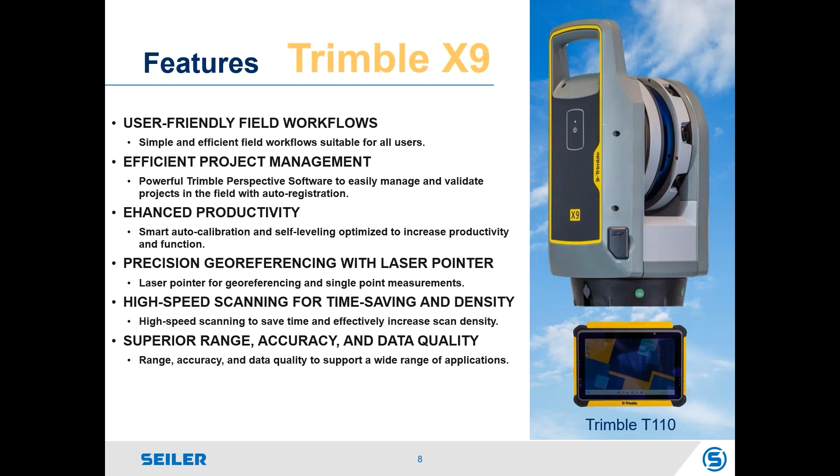And the range, accuracy, and data quality are pretty much unmatched. I have another page for some of its features because there are so many awesome features about the X9.

High sensitivity for dark, captures dark and shiny surfaces. If you've used other scanners, you might have seen problems like a bright shiny black car showing holes, requiring powder or spray before scanning for it to show up. The X9 takes care of that - you don't need any powders or sprays, and it shows up just beautifully. I'll show you some of that.

We talked about the auto-calibration, also survey-grade self-leveling, so it's dependable. We'll talk about this IP55 rating a little later on a different slide, but it's reliable for dust and water protection, and we'll also talk about the temperature ranges.

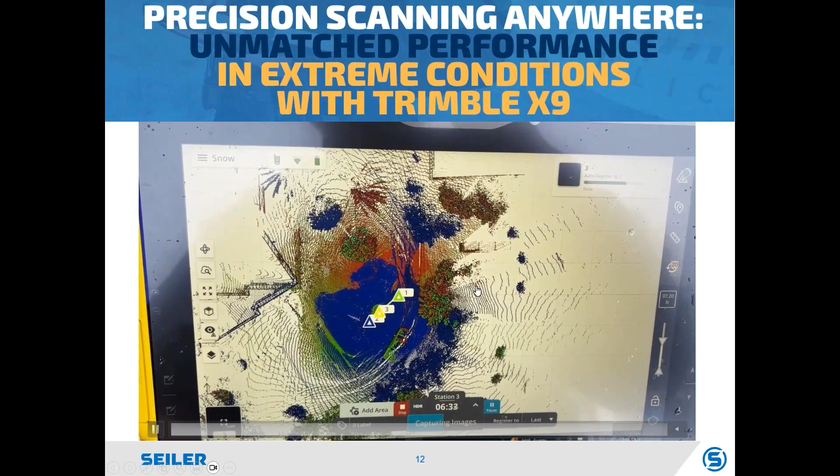You'll see this blue scan snap to the red and green scan here in a second. And so you see it's all registered there. If I just back it up, you can see it snapped in right there.

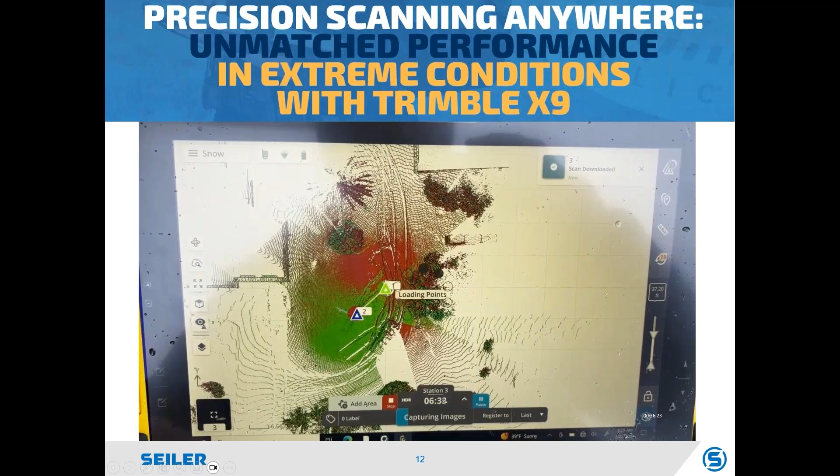If I clip that out, you can see the scanner scans so fast that you can actually see the snow here — it's scanning the snow as it's falling, because that's how fast the scanner is. It just kind of shows you proof that the weather isn't really going to affect your ability to go out there and get data.

There's no audio on this, I took the audio off. It's just one of our marketing videos that our marketing team did with Richmond, Kentucky Police Department, a big customer of ours. It's showing some of the stuff they're using it for in the rain, being able to do black shiny cars, low light situations.

We offer FoxFury lights for the scanners. And what's nice about the tablet is you don't need to be right next to the scanner. You can sit in the car or in a building, stay nice and warm, or stay dry, and operate the scanner without having to be right next to it.

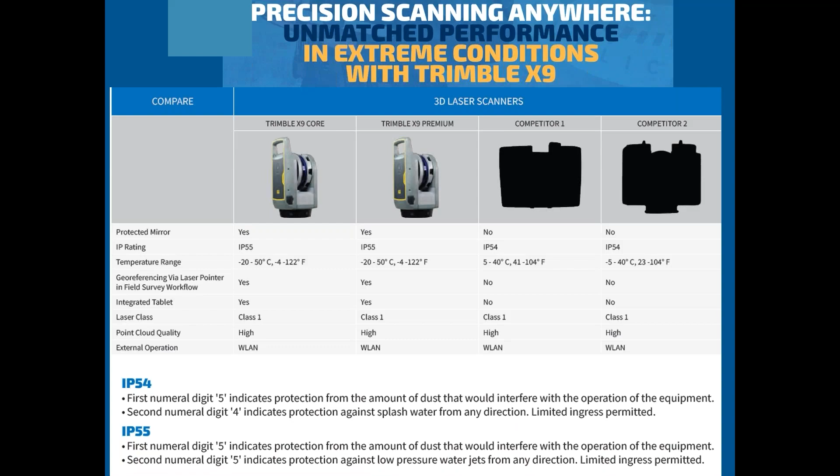So we put all this stuff to a test. We created a white paper, so we tested all this stuff in the extreme cold. I went and scanned in -3 degrees up in Michigan at night.

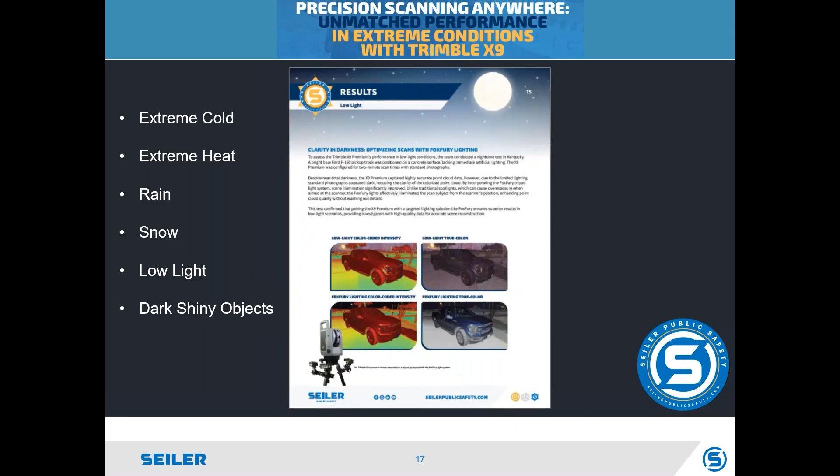Extreme heat, I did some scans at, well, I think the ambient temperature was like 97-ish, where the asphalt temperature was in excess of 100 degrees, and we took the temperature of the actual instrument that was baking in the sun, over 100 degrees. We also tested in heavy rain, heavy snow, low light conditions with no lights, and dark shiny objects.

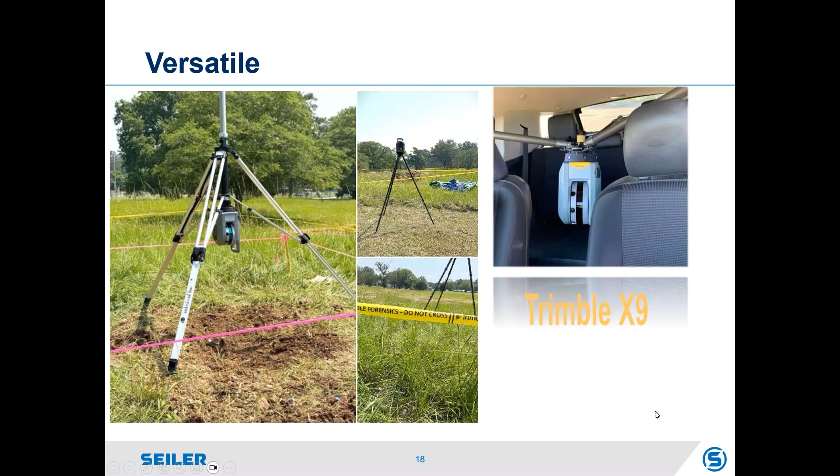We also sell the NIST target. NIST stands for National Institute of Standards and Technology. So each one of these targets is actually sent over and certified by its distance between those two points as 1 meter. So you want those in your scans because then you can verify its accuracy.

And that's why it's on an angle, so it's not just measuring or verifying on a horizontal or a vertical, it's measuring X, Y, and Z. So we can go into the software, this is the RealWorks software, and actually do a target extraction, then verify the distance of being 1 meter in between those.

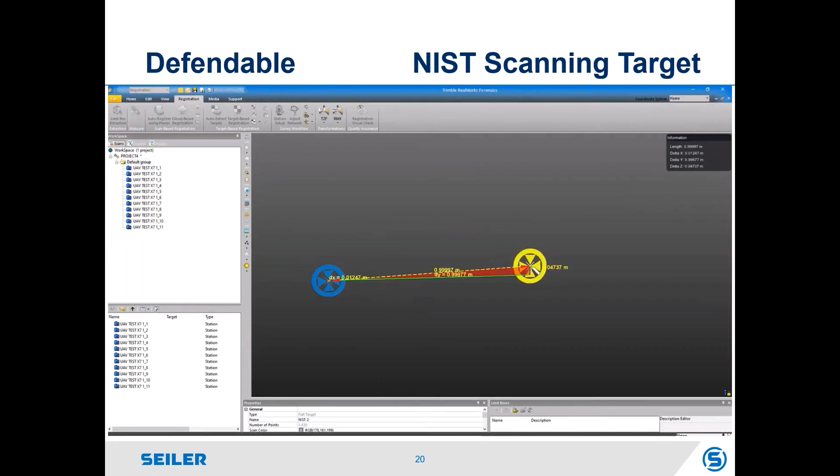So something that Trimble, and Seiler also, feel is very important, is having a solution that's defendable in court if you're ever asked about the accuracy of your data. So that's something we definitely try to include with all our scanner purchases.

You can take a photo of it, attach that photo to that point, and then you're going to grab and measure another point that's going to stand out in your point cloud, and it's going to have an XYZ coordinate to it. So it's almost like a topo shot or a total station measurement inside your point cloud, with a photograph attached. Justin, do you want to chime in a little bit about the precision point?

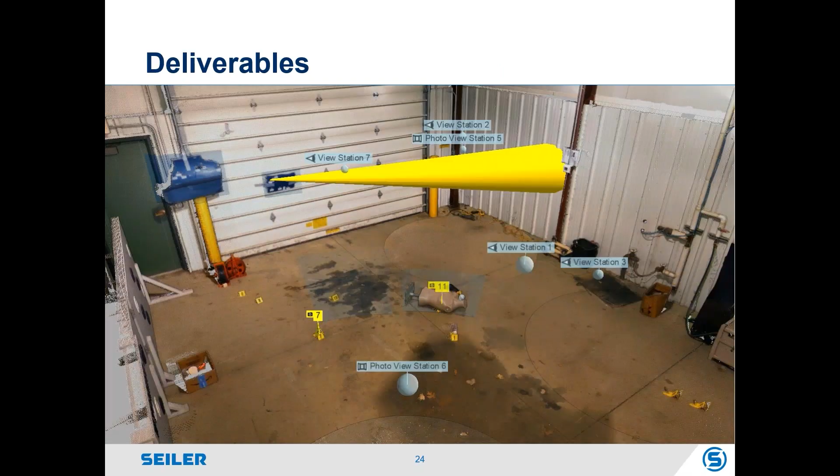Those photo stations also export to a free software called Trimble Showcase. If you're wondering how your prosecuting attorney can view this point cloud and navigate around in it, it's a free download, so you can export these view stations into there, and then your attorneys can move around in it. They don't need a supercomputer or any special training.

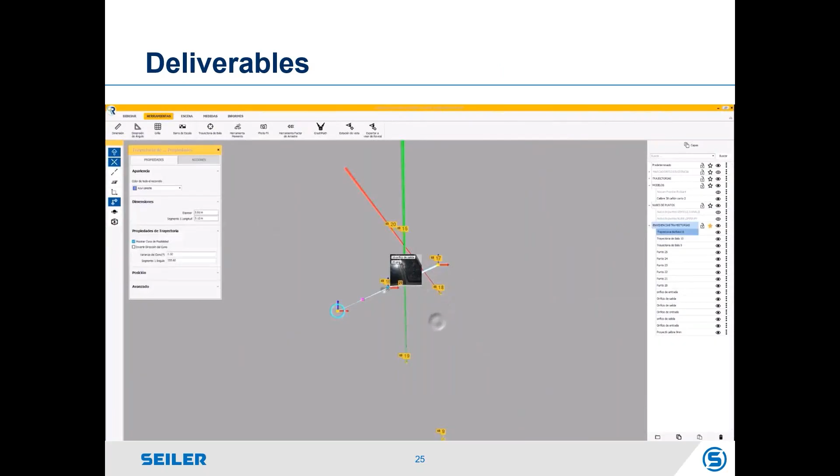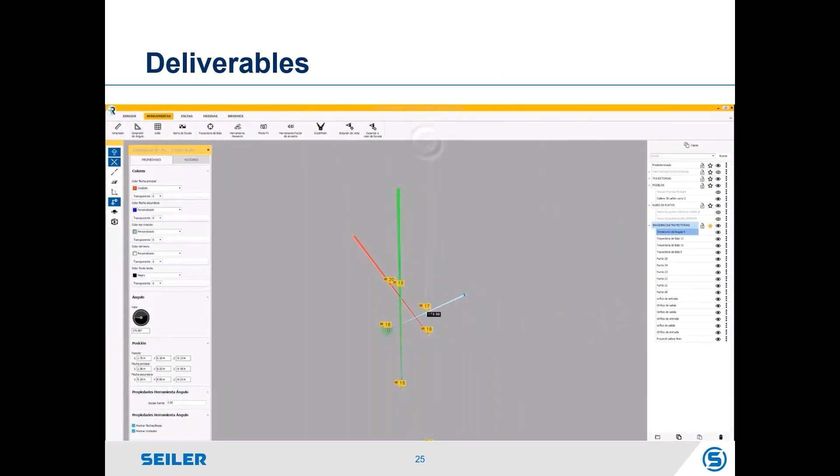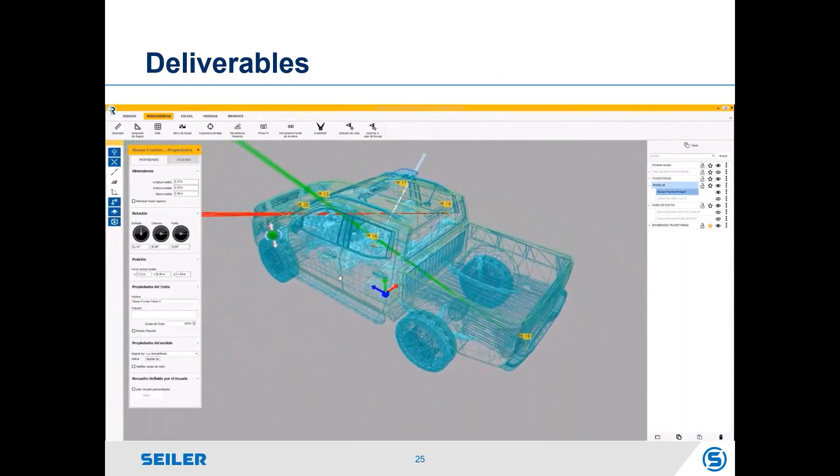This is an example of shooting into a car, in the Reveal software, taking that point cloud and the data with the precision points. You can see photographs attached to each precision point using the angle measuring tool and the trajectory tool, then creating a visual model, taking a model of the vehicle and putting it over the point cloud. You can make that model into more of a wire frame to show visually how that round penetrated into the vehicle as it went through. So there are different things you can do in the software for creating deliverables.

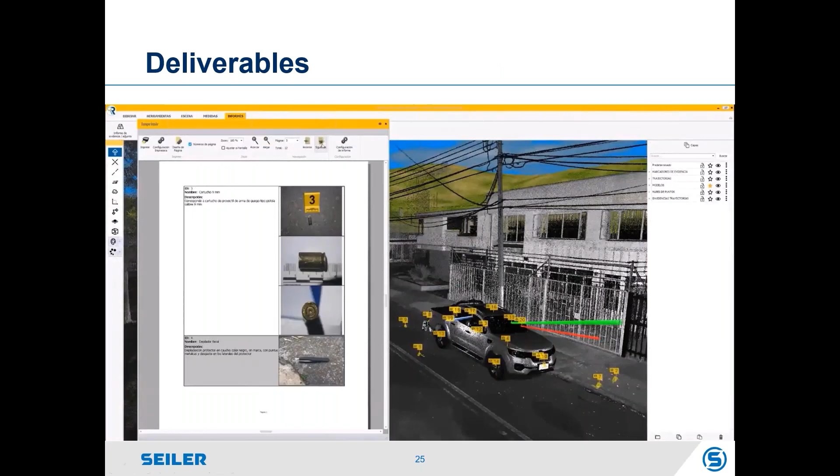So those are all the photographs taken with the, let me back that up a little bit. Right there is the evidence report, and those are photographs that can be attached to each one of those evidence markers on the right there.

You'd also use that at a crash scene, like tire marks will pop out in a color-coded intensity that might not be visible in true color. Same thing with an arson scene - arson investigators love this, with different views. In a grayscale view or color-coded intensity, things might pop out better and be easier to see. Fire and arson investigators might be able to find a point of origin just by looking at different views that can point them to where it is.

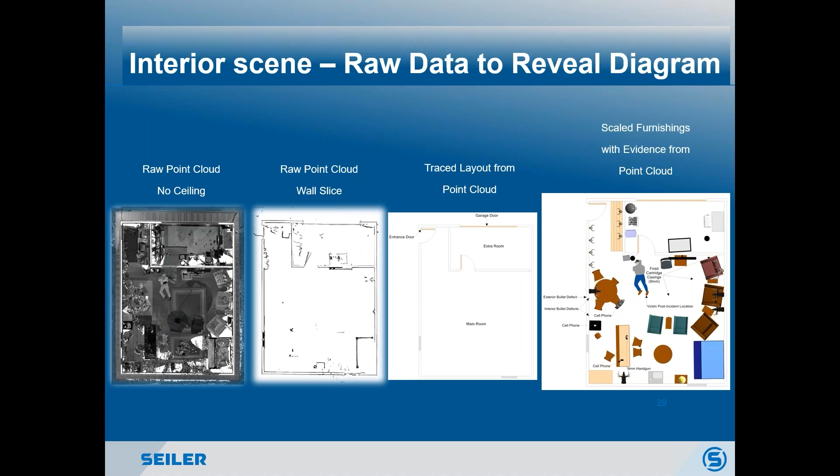This is just showing the raw files, and then I'll show what I did with this one. This is a shooting scene that happens in a bar. Someone comes out of the men's restroom, and then there's an interaction at the front door.

So if you have a case where you need to do an interview of somebody, and you're like, man, I really need a really fast and quick diagram or layout of the interior or exterior - this is done in RealWorks, but you can create these from these raw scan files. Some of these really fast layouts don't take any time at all.

So this is just showing the raw point cloud, and then from this, what I did eventually from a diagram standpoint - from that point cloud, every one of my interiors, I do this workflow on every single interior, and I layer my diagrams.

So the very first one is that layout. I have to figure out my exterior wall thicknesses, my interior wall thicknesses. Once those are set, now I'm using lines, ortho snaps. These doors, that's a function of a line, an arc tool. I'm snapping the lines and using rectangles. It's very simple, just basic CAD type diagramming.

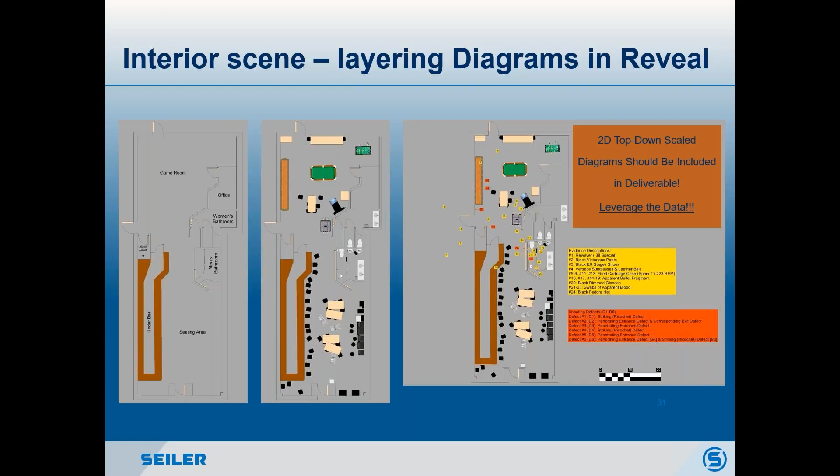So then after the furnishing gives you a lot more context, typically I will show a diagram with furnishings and then evidence. This one has a bunch of bullet defects.

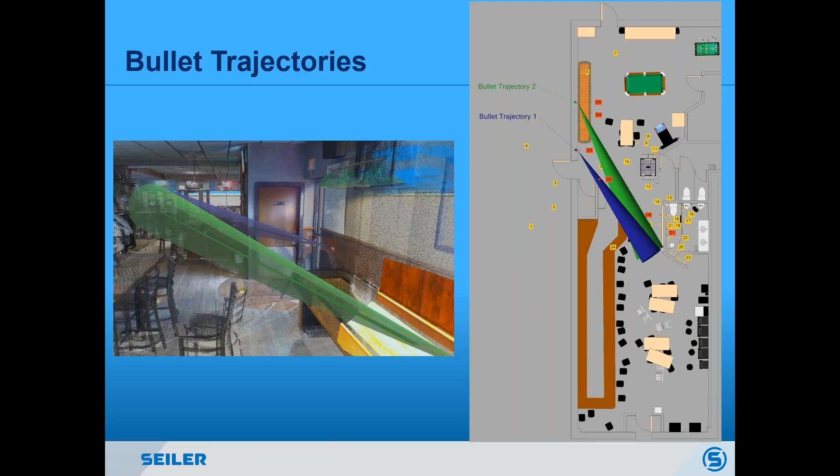Okay, looking at my time, so I got about 10 minutes. So SketchUp Studio, I've been running this for about a year. Paid subscription, so this one costs.

This is ultimately, I think, kind of where things are going. But what's really nice with this, the reason I wanted this really bad, was it has this Scan Essentials toolbar, where I can bring in point clouds and actually model and build things off the point cloud. And the Scan Essentials tool set - it's the same scan engine as Reveal and RealWorks is using. It's like seamless to go into here.

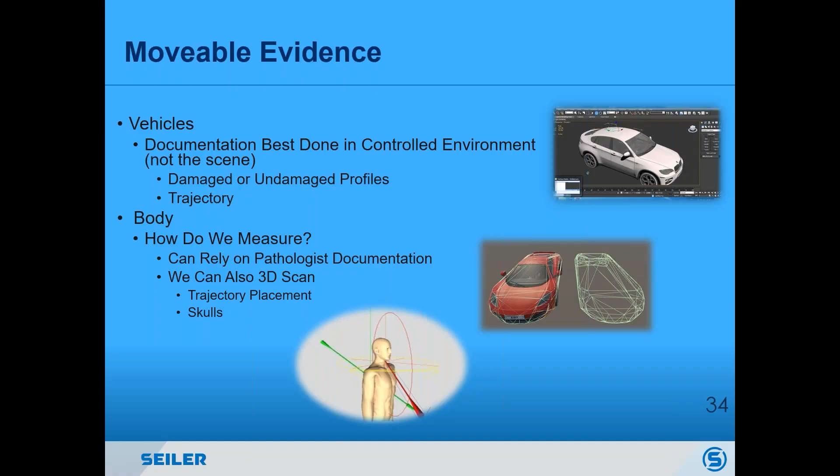The other challenging things with scan projects can be movable evidence, really vehicles and bodies are probably the two biggest movable pieces you're going to scan or document later. The first one we'll talk about is vehicles. When I think about crashes, it's probably because of a damage profile or a trajectory you're looking at.

This feels like I'm cheating. To build a damaged profile vehicle in Reveal is crazy easy. If you have a scanned vehicle, you bring in that point cloud, size a model to the point cloud in Reveal. I turn off my model, turn on my virtual total station, map the damage of that vehicle using the point cloud snap, turn off my point cloud, turn back on my model, and then edit and crush the damage to the actual measured points, just like you would in the old days with a total station. This is really fast and easy to create. This model took hardly any time to create that profile, and then you can incorporate it back into your scene.

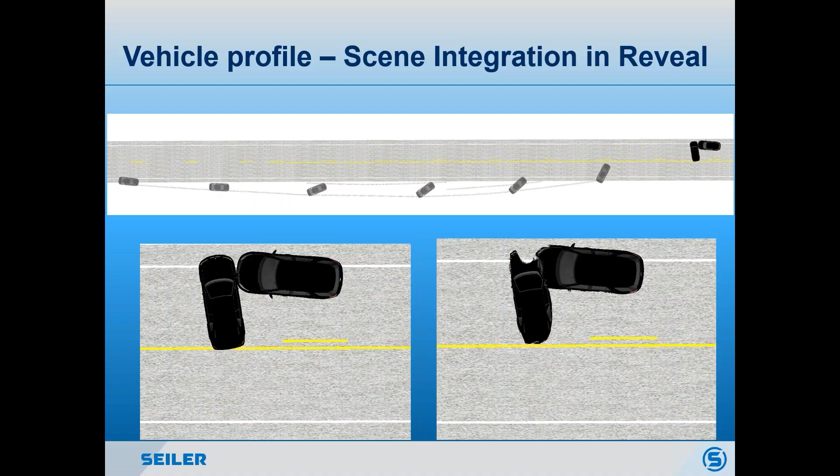This is just showing the sequence. Vehicle loses control—this is a pursuit—and rotates back onto the roadway. You can see an impact orientation, and then turning on that damage. It's really simple to turn it on and off to line your vehicles up.

I have plenty of examples of how much time this saves, but doing vehicle trajectories is kind of the same process, building off a point cloud. You can build houses, cars, whatever. This was done using SketchUp, where we scan the vehicle with trajectory rods in place. I also do precision points, but you scan those rods in place. It's really easy to pull trajectories out, but it's all based on making sure the rod placement is correct. So you scan the vehicle with rods in place, interior of that whole vehicle.

Now I bring this into SketchUp, find a model, build the model, and size it directly to that vehicle. In this one it actually had interior seats, so I didn't have to go find more. I just removed the roof—it's hard to see, but in the bottom right it's kind of dark with the slide. The seats and center console are all built to the point cloud, so I can place all those inside. This was a shoot, just like a Tuesday afternoon in Milwaukee. These were the rounds going in—there's actually a bunch of rounds coming out of the car too. This is just a way to show vehicle trajectories.

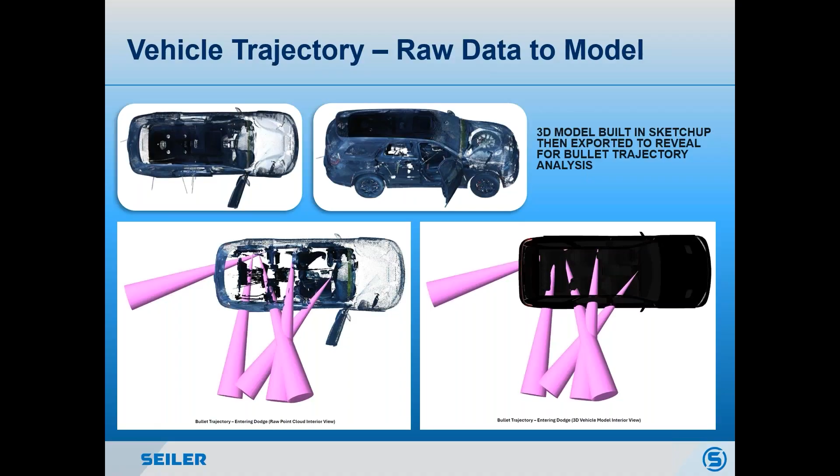If you find that vehicle on scene, you can bring it right back to the scene of where it was located, using axle center locations, where on scene you measure two points. Then later when you scan, you measure those same two points, and you can snap that right back—just like using or merging additional tool sets, like a total station or whatever.

So go to your next—I think we have a couple slides left. So then, bodies.

So this was done just with a scanned scene and some of the evidence that was found on scene, but then using trajectories. This was one that was not scanned, the body wasn't scanned. So we can bring in bodies within Reveal, place that body within the point cloud, and actually show and determine how some of these trajectories, where they came from, or the angles, or convergences, whatever.

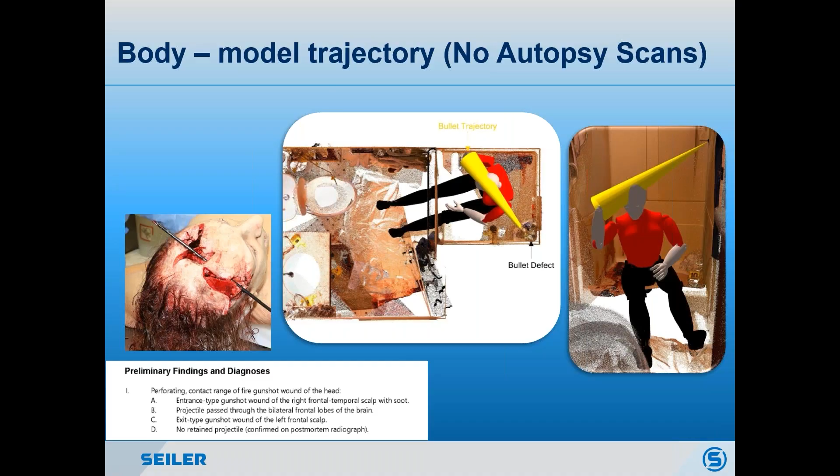But this is one showing a body that wasn't scanned, and just some of the stuff how you can use that point cloud. And then the last slide here is showing a case where you can actually scan the body with your trajectory rod in place, which is no different than a car. It's a little bit more challenging on how to actually position it after, but you're trying to line this up with scene evidence.

So we have scene evidence within a door of a bullet strike. It was after, this person was shot. So just consider that with vehicles or bodies, movable evidence, how you're going to incorporate that back to the scene and how you document it properly, especially with trajectory. I always scan with rods in place.

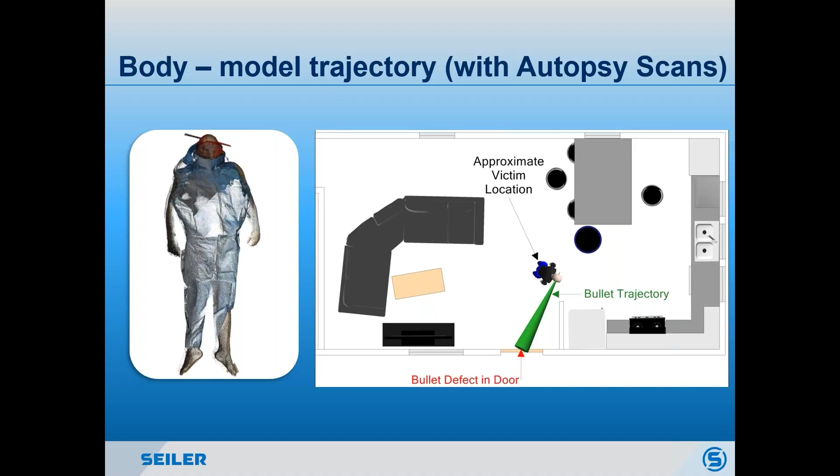And you can really create some pretty simple, painless, very easy to understand diagrams later that could be helpful for your case. So when we make these, there's so much to show - it's always like, where do you start, where do you begin? You could talk forever, but I think that gives us at least somewhere to start.